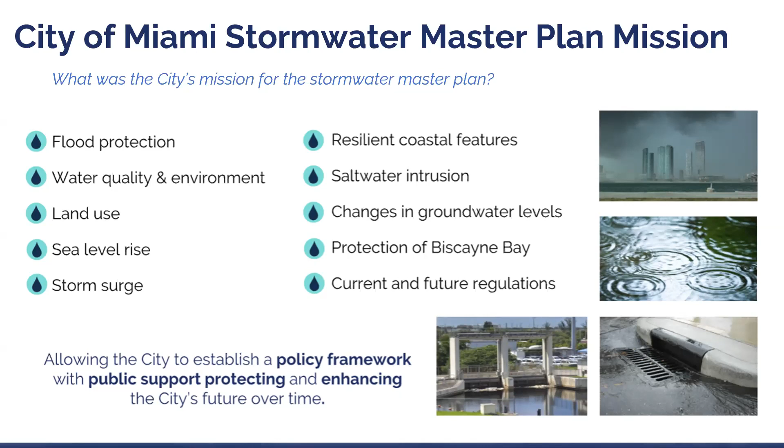While you look at sea level rise, which is happening, greater tidal surges from events such as Irma and others that come up in your system, the king tides that go into the streets, looking at resilient features to address that, they're green and gray. Managing saltwater intrusion to protect your groundwater supplies and reduce the impacts on those. And the changes in groundwater levels, which then over time will change the types of systems that will protect you from flooding.

And how do you regulate that on time and encourage people to move forward with you in the future? So we worked with the team to define those goals to achieve the mission and also metrics for success, looking ahead to the end point. Where do you want to be in 50 to 70 years? There's a 50-year plan at point, but the good news, the things you're implementing can last longer. And so we'll see as you adapt into the future to be resilient and sustainable as possible.

So controlling flooding, protecting water quality, building public amenities within your parks, along the bay, along the rivers. The coastal resilience barriers can be public amenities with trails and other public park amenities. Operation and maintenance, there's a lot of stuff that gets in the pipes. And so there's things that can be done, one, to keep it out of there, and two, to clean them out to get immediate success.

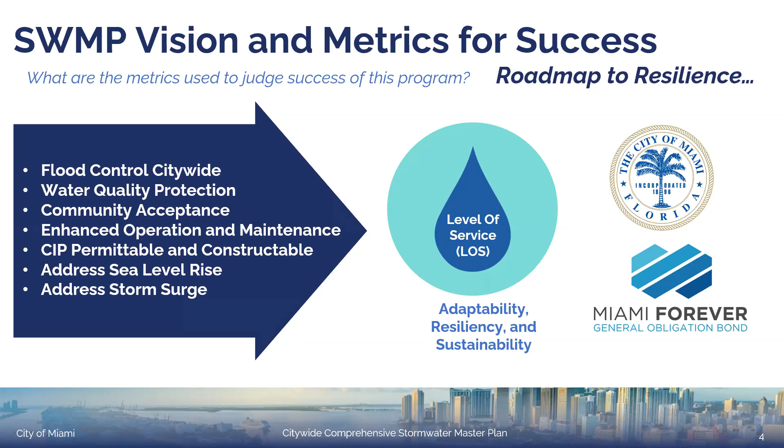The capital improvements program, which is significant, but also, as the commissioner said, will be disruptive. It's going to change a lot of streets. So the phasing of that to make sure that it's happening properly and can be done in a reasonable time is important, and addressing those sea level rise and surge issues. So the issues and constraints, you know these. You have, very importantly, Biscayne Bay. It's why many people are in Miami, the enjoyment, the beauty of the bay.

Relatively flat terrain with closed depressions where stormwater is trapped means the water table can rise quickly. The good news is you sit on one of the most conductive aquifers in the world, able to discharge stormwater into the ground safely. But it also rises because it's very conductive—it moves water quickly. High impervious, low-lying areas, increasing tides.

The system has some locations which are older, and we'll look at that for maintenance. There's flow interconnecting—stormwater does not know boundaries. So between the city, Miami-Dade County, Coral Gables, and other communities, South Florida Water Management District with their canals, DOT with their major systems that run through, coordinated efforts to implement will be important.

This is all there for everyone to see how they can help in the solution, as well as you, individual citizens, for onsite opportunities to catch your stormwater and water your plants, which helps reduce the water you use from the ground for irrigation. But also the nutrients go along for the ride, so it also helps with the bay.

So that's very important. We look at these metrics for protection, for levels of service—for flood control, how well a system operates or keeps water out of homes and buildings, keeps your roads passable for emergency traffic, for police, fire, ambulance, and evacuation.

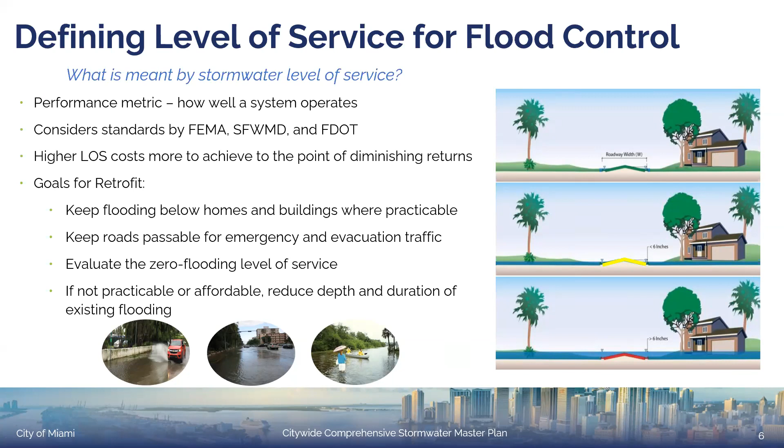That balance of cost with benefit is important, and we have analyzed that. So as I said, looking at no flooding of crowns for the 10-year storm, that's significant. As you can see, many of us have experienced this before where it rains maybe less than that and it happens. There may be a variety of reasons for that—the pipe system can need to be upgraded, it could be maintenance, et cetera.

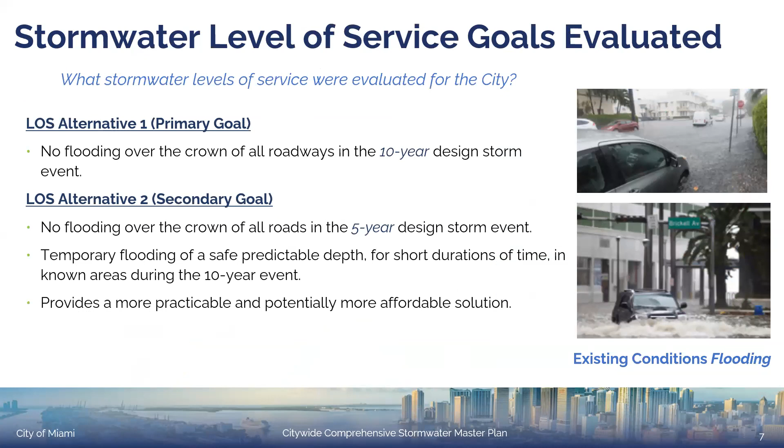So we cover that. The secondary goal is the 5-year storm, to look at a 7-inch event, which is still quite significant. And so we've balanced that—you'll see 2 alternatives, and the city recognizes that there is that balance. The key, of course, is to make sure that public safety is protected at all times.

Also importantly, you can't just move the water downstream—you can't just pump it over or put a bigger pipe to another location, to the Miami River, because it will move downstream and can cause flooding. So we've worked to make sure that each project can stand on its own, does not cause downstream problems, and meets your goal for flood control, water quality protection for the bay, and puts water in the ground as possible and works within your streets.

So the process itself is the next stage, and I'll turn it over to Jon Goldman, who will step through the process and the data that we use to develop the stormwater tools.

Thanks, Mike. Good evening, everybody. It's Jon Goldman, I'm the project manager for the Stormwater Master Plan for CDM Smith.

Let's start with what our Stormwater Master Plan accomplished. We did it in 5 phases: data collection and evaluation, flooding and water quality modeling, infrastructure recommendations, policy and guidance and standards, and tools and training for your staff. We established comprehensive program goals, created a brand new stormwater asset geodatabase in your GIS, developed a prioritized CIP list for the desired level of service that meets your funding, provided guidance with future policies, and updated those stormwater design standards.

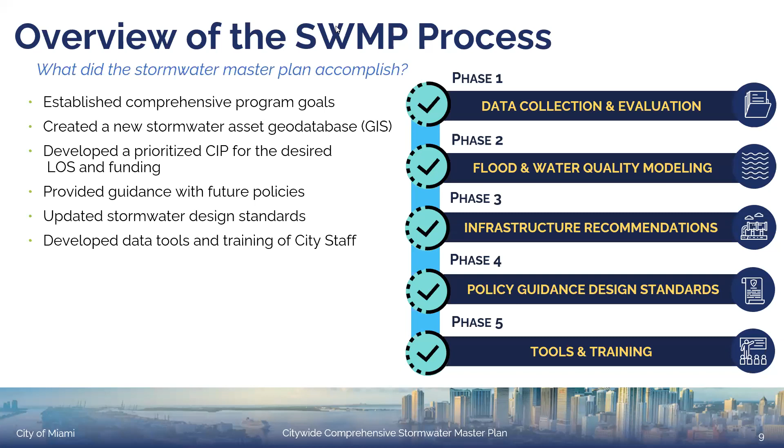So in the data evaluation phase, what kind of data went in there? We have about 33,000 plan sheets of stormwater drainage systems citywide, and 2,500 archived paper plans and documents. We were out in the field for survey verifications where one plan didn't match the other—getting all the stormwater structures, critical building finished floor elevations, canal cross sections, seawall elevations where you have no seawalls or existing seawalls, land topography, and evacuation routes. Of course, finding all the outfalls.

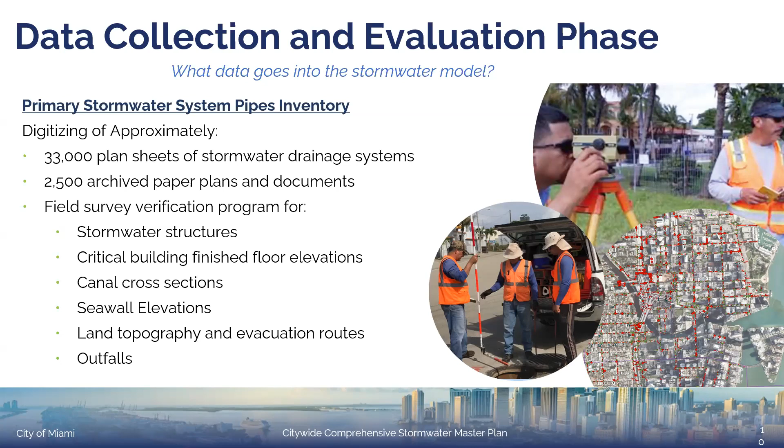Other things that go into the stormwater model, all this goes into the digital model: South Florida water management, rainfall, design storm data. This is modeled by intensity, duration, and volume of rain. Impervious area coverage is how much of your area is paved versus grass or green. Digital LiDAR, which is fancy for topography. Soils and groundwater data: how fast does it infiltrate into the ground, and how does it work when the groundwater comes up? Canals, pump stations, and control gates are at your boundary conditions, and those regulate how fast the water flows off the land.

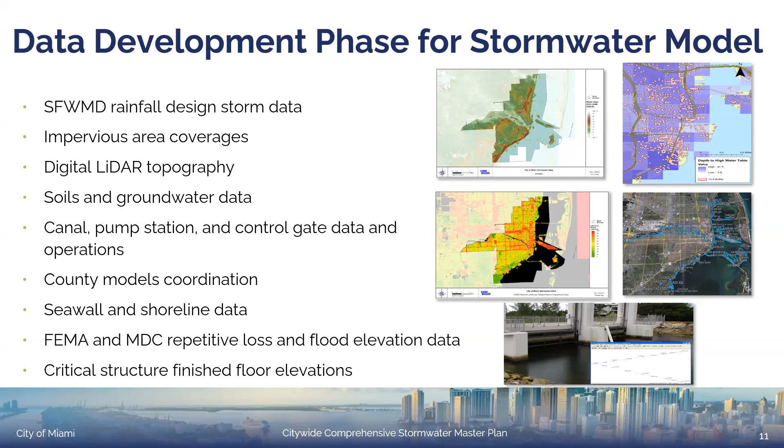Remember, stormwater does not end at the city limits. Jurisdictional boundaries aren't part of stormwater, so we had to take the model out further into Dade County and other cities and coordinate with the county models that exist, to make sure we're accounting for flows that currently flow through the city and must be maintained. We've got seawall and shoreline data, and of course repetitive loss and flood elevation data and some critical structure finished floors.

We also had a public outreach campaign, and this was very important because we used crowdsourced data solicitation. We went to each commission district, each area, and we brought maps and said, where are your flooding problems? We want to listen to you because we want to know where the worst flooding is according to the citizens and residents who live here.

So we had these resident neighborhood flooding workshops and gathered all sorts of data, which we brought into our model and compared what our model is saying versus where your flooding is. The more data we got, the more refined the model became, down to the neighborhood and street level. We also had resiliency committee workshops and industry expert workshops, educational blogs, and web content, so that everybody knew terms like sea level rise, flooding, seawalls, protection of Biscayne Bay, and storm surge. These became common words because public involvement and education lead to public acceptance.

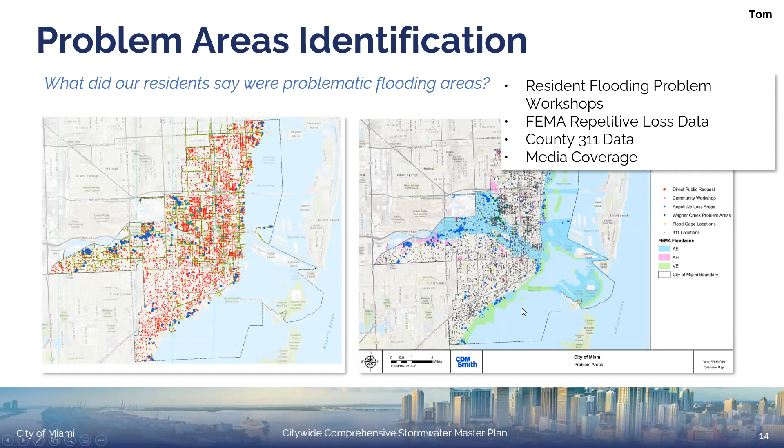All of this went into the model as a comparison for existing conditions. And on the right here, you see how we compared some of those to where the FEMA flood elevations are. You can see it goes along the Miami River in the riverine areas, and they all correlated fairly well. So now we knew where the clusters of problems were. So now I'll turn back to Mike, and we'll talk a little bit about the actual stormwater model itself.

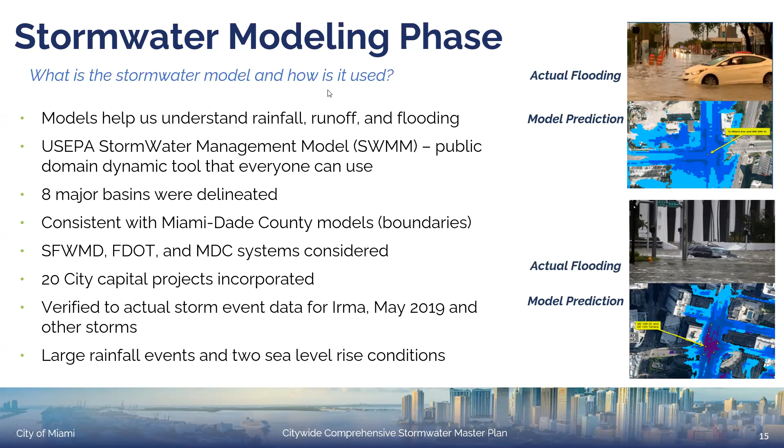Here's a couple more of those. We also look, in addition to the rainstorms, at two sea level rise conditions in the future, 18 inches and 30 inches. We've learned that in time, as the Southeast Florida Climate Compact has identified, and NOAA as well with the Corps of Engineers, there's a wide range of potential changes that can happen in the future. So we looked at finite depths, which we know will be within those windows of time for your 50-year planning horizon, to make sure that you're addressing the worst potential conditions that can occur.

As I said earlier, there's a lot of imperviousness, a lack of systems, some places are built too low, and some roads and homes are too low. There's a limited amount of pumping, but with that said, pumping to the bay is not the best solution to protect the bay. So a lot of the pumping we're proposing will actually be down into the aquifer, into the ground, to reduce saltwater intrusion, and only pumping what we must.

I'll talk about that momentarily. Keeping up with your systems, helping people to not throw things into the systems, yard debris—it's amazing what you'll find in storm drains. Bricks, concrete, baby diapers, engine blocks, you name it, we've seen it. And then of course, managing the seawalls, 90 miles or so of seawalls, largely privately owned, that may be required.

So a lot to do there, but we're giving the guidance to achieve that. The key is to collect water up in the higher areas so it doesn't get down into those closed depressions, with exfiltration systems and recharge wells where we can put them. Exfiltration, by the way, in the streets is like a 4-for-1 coupon because it collects, stores, treats, and infiltrates water for the best cost within your right-of-way. And it can eliminate some of the peripheral impact for construction. So it does a lot of things that are very valuable to achieve all your goals while protecting the bay.

Connect the projects with pipes where you need them. Sometimes the pump stations first go to force main wells, and then secondly, go as necessary to the bay. We're trying to maintain the pre-development, current condition volume that's discharged to the bay while reducing the pollution by treating over 1 inch of the total runoff over the city. So that's very important. It creates storage and flow capacity, but very importantly, protects your homes and allows the emergency traffic to drive during those design storm conditions and high tide conditions.

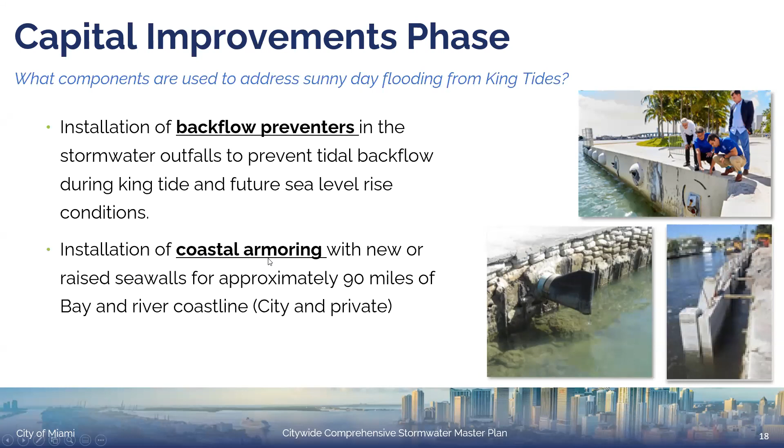Additionally, you have 486 outfalls. The city is already ongoing in terms of putting in backflow preventers. This is one older example, but there are more modern smart valves and things coming online. So the city's looking at different technologies to prevent the backflow, but allow water to go out during those normal dry times as well. And then coastal armoring with green and gray options, with different types of barriers.

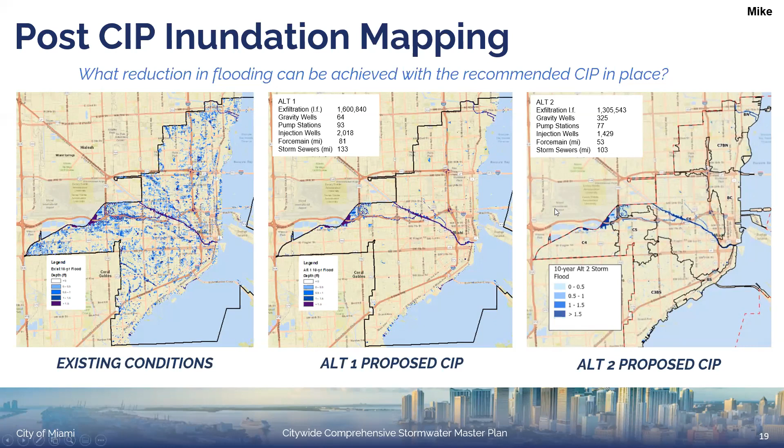So we did look at the benefit versus cost, which importantly can, one, guide you for the best buy solution over time, and secondly, very importantly, set the stage for grant funding opportunities and cooperative efforts with other entities, such as FEMA, the Water Management District, DEP, the Resilient Florida Grant Program, and others.

So for water quality, as I mentioned, we're providing over 1 inch of treatment for the entire area, basically through the exfiltration and wells to protect the bay. As we know, the bay is one, an outstanding Florida water, and secondly, has impairments. We've seen fish kills and things, so it's important to reduce those loads.

Also, very importantly, temperature affects the bay. So all these exfiltration systems not only catch the pollution, but the hottest water that comes off the streets in the summertime, which can have great impact on the manatees, on seagrasses, and the related systems in the water.

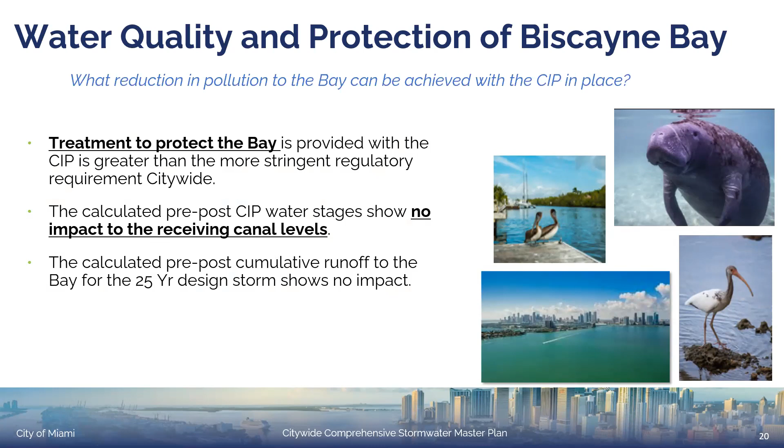So we're looking at also managing the amount of flow, not just moving it downstream. So no impact to flooding downstream in the canal levels. So meeting those South Florida requirements and making sure that we meet, importantly, your goals.

So these green features coordinate between your stormwater systems and the coast. We've identified opportunities for collaboration. We'll also give guidance for public and private partnerships. So how can you do green infrastructure on lots? How can you catch the runoff from the new development and be part of the solution?

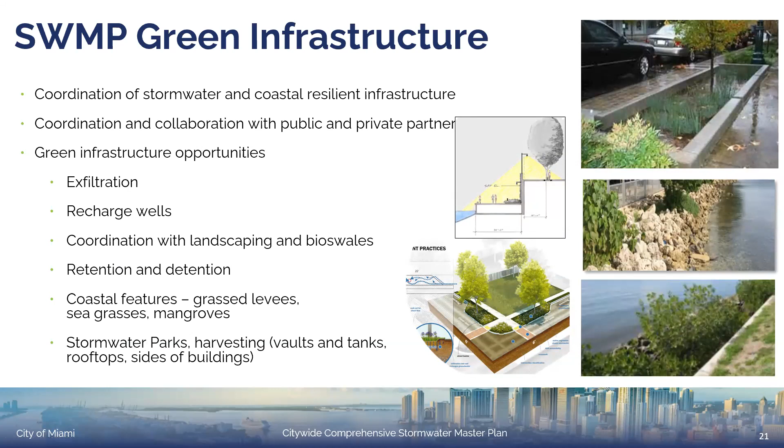As I mentioned, I've been going through these are the different components. As you move down through it, there's a lot that I've talked about: exfiltration, recharge, stormwater parks, and coastal features. So the plan is to green it up as we can and try to implement in a phased approach.

In terms of looking toward the benefit cost, we analyzed a series of alternatives, 1 and 2, as we mentioned, also with 2 sea level rise alternatives. The costs I mentioned are significant, ranging in these two from $3.8 to $5.1 billion. Here's the value though. The value opportunity is that using a FEMA tool called the Hazard US model, it's a standard tool, HAZUS, we looked at the benefit to cost ratio.

And that's not considering all the social impacts and the economic lost opportunity. That's simply the flood damage of water in buildings and flooding the roads. So this is a very good investment to demonstrate to FEMA and other entities that this is a solid solution now and in the future to achieve these goals in a cost-effective way.

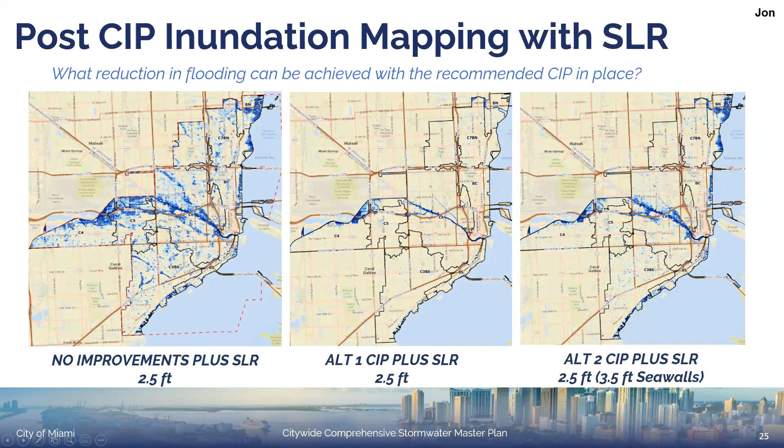So here are the maps. This looks at the sea level rise effect. Previously we looked at the water with Alt 1 and Alt 2, these levels. They're a little bit higher than they were without sea level, but they're still manageable and largely contained within certain corridors where you have adaptable options to implement into the future.

So with that, I'll turn it back to Jon, who will present the project areas in more detail.

Thanks, Mike. Let's talk about what factors were considered for the first project areas: a high number of flooding complaints, highly visible areas with repetitive problems, areas of known capacity shortfalls already on the city's priority list, spreading projects throughout the city per the guiding theme of the Miami Forever bond, taking advantage of coordination opportunities with private development and other city projects, and attaining quick level of service improvements with measurable results for readily solvable flooding issues, so you can see results early on.

And of course, flexibility in all the projects so they can be easily subphased within funding parameters or remaining bond capacity. Some were selected with slightly less complex design and permitting to take advantage of potential stimulus from the federal government that may be coming. You want to be shovel ready when grant funding or stimulus arrives.

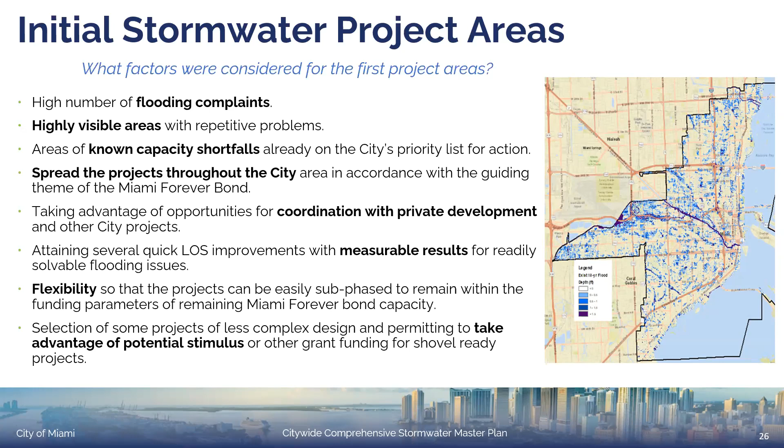Go ahead, Mike. So our initial stormwater project areas — there were several in each district. In District 1, Melrose; District 2, Morningside, Brickell Business...

Brickell Business District and Edgewater, then Latin Quarter in District 3, South Shenandoah, District 3 Riverside, Jose Marti Park neighborhood in District 3, District 4 Coral Gate and La Pastorita, and District 5 South Shorecrest and North Shorecrest near 84th Street stormwater improvements.

The important thing to remember is that we looked at the city holistically, and all the improvements build upon one another. So if you don't see something in your particular neighborhood, it might not mean you're not a priority — maybe the root cause of your flooding comes from other areas we need to solve first, to stop water from entering your neighborhood and let those areas clear their existing system capacity and work more effectively. There's a synergistic thing going on with how these projects are staged.

They're very flexible. In parallel, we're also working with the city to solve individual areas of flooding at the intersection level, where nuisance flooding has been happening on certain streets not on a citywide scale. So that'll be happening as well, in parallel.

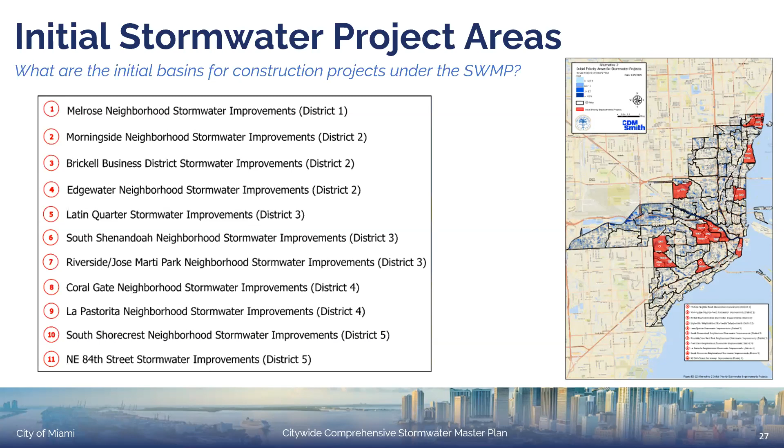So where do we go from there? What are some future criteria for phased projects? Again: highly visible, repeated flooding conditions; areas slated by the city for previous flooding improvements; standalone areas of citywide flooding that are resolvable or partially attenuated by impactful exfiltration systems. These are rapidly designed, permitted, and constructed, and can go in quickly, providing relief not only to that area but to others, because as water infiltrates into the ground, it comes out of the existing system and other systems begin to work better.

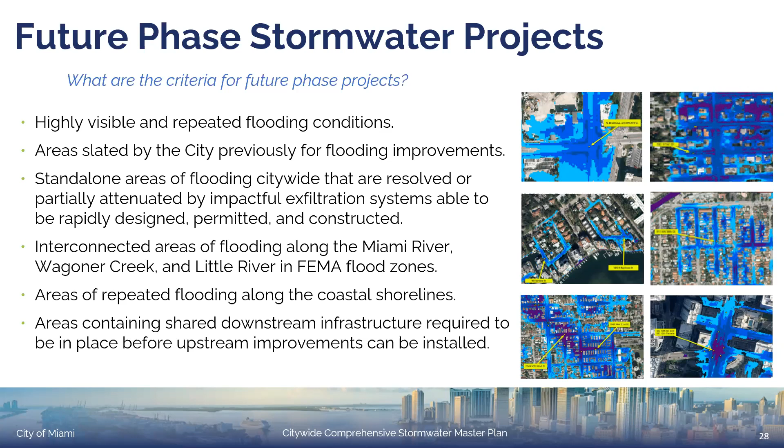Then moving on to interconnected areas of flooding along the Miami River, Wagoner Creek, Little River — those are in the FEMA flood zones — and areas of repeated flooding along the coastal shorelines. Keep in mind that areas containing shared downstream infrastructure required before upstream improvements can be installed should go in first. If you need a pump station, it does no good to put in all the pipes upstream unless they moved because of some other pushing priority.

Okay, Mike? So some factors that determine the priority and shuffling of future phases — this will be changing, it's a very flexible program. Number one, funding or grant and loan availability. That will dictate the size of the projects you can do and where you're going to go next.

Coordination with other utility and roadway work — DOT comes in and says, I'm doing this roadway in the next 3 years, and then there's going to be a 5-year moratorium and nothing else goes in. Well, that becomes a new priority. You want to get your stormwater in first.

Public-private partnerships: a developer comes in wanting to build where a stormwater pump station or other infrastructure is going in — that becomes the priority. Let the developer work with the city and put those programs in first. Environmental permitting requirements, NPDES or MS4 program: if pollution gets bad in an area and that becomes a priority to solve, those projects can move forward.

There are also some factors that will move projects backward, like design and permitting constraints and project execution period. If a project is starting to run into hurdles because of trying to find a route for a force main, or trying to buy a piece of land for a pump station and it's not happening, those can move back.

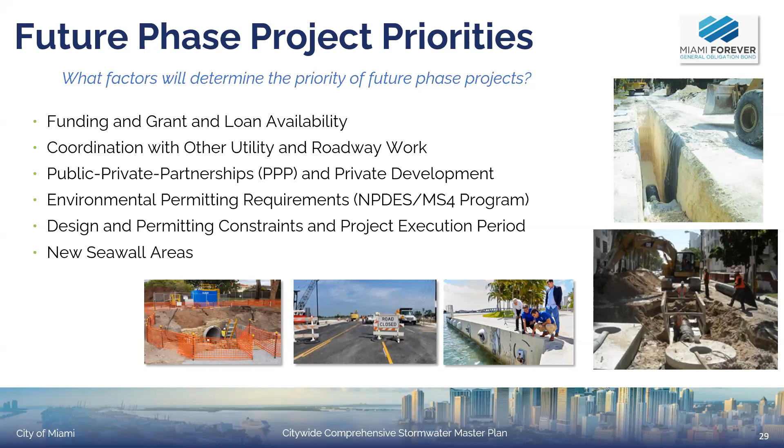Very importantly, the new seawall program is going to put in these seawalls to keep the sea out. At the same time, if there was no seawall there, which there isn't in many places, it will trap the stormwater in. So that needs to be coordinated so you don't cause flooding by putting in a seawall where there was none before. So that would become a priority and move up as well.

The further you go west, there are no canals and areas out there where you can simply pump water to. You have to pump them very far east. And the other part of that is you have to lower stages in the canals and other places before this new water can be released.

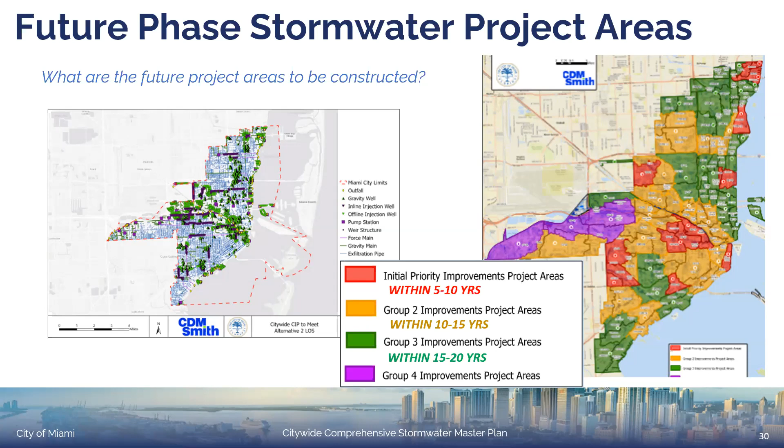So this really lends itself towards starting discussions for regional solutions. And what we mean by that is working with Broward County, working with the South Florida Water Management District to try to find solutions for these areas that would benefit other cities that are out there, unincorporated Miami-Dade County, or other South Florida Water Management District areas, so that we can get a regional solution and try to help these areas in an earlier manner.

So this is those areas we're talking about. There are some areas that we could do immediately out in this area. These are complex, larger lead time projects out in Flagami and Le Jeune Gardens, and there's a flood problem out there. Those elevations are down near 3, and they're in the bottom of the bowl.

So these are areas that need to have large pumps and other things happen first. So we try to work in the areas around it, try to capture things uphill and make those a little bit less while we're looking for those regional solutions.

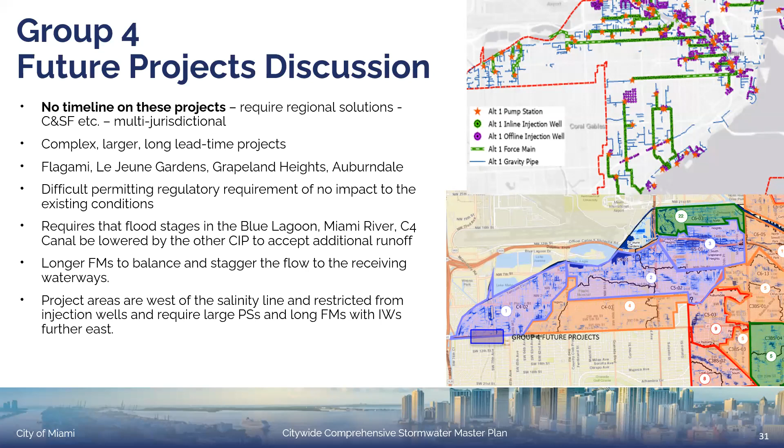What are our next steps? So for the stormwater program itself, there's some training coming up for the city staff so they can start looking at what-if situations and doing modeling by themselves. Public outreach continuation, very important meetings with the regulators.

So the plan is to have a citywide conceptual environmental resource permit application and address any regulatory responses. The first couple projects may go out piecemeal, and as the permits go in, the regulators, after seeing several of these, will say, what is the large plan that is happening? How does this all work together?

So if you can get the conceptual permit done ahead of time, the regulators will simply look at the master plan, compare each one of these small projects to it, say yes, that conforms to what we're doing, and they'll be very easily permitted. Of course, next is the funding plan for the next phases of your CIP, and there's a community-wide conversation around funding for that needs to happen, and looking at different priorities.

And then next is the CIP implementation. There's an immediate action plan in the Stormwater Master Plan that consists of cleaning of that existing system and getting the seawall program and the backflow preventers and existing stormwater pump station upgrades and things that you can do to your existing system so you can get the original design capacity back. And that'll take care of a lot of these areas which are having problems in the regular afternoon thunderstorms.